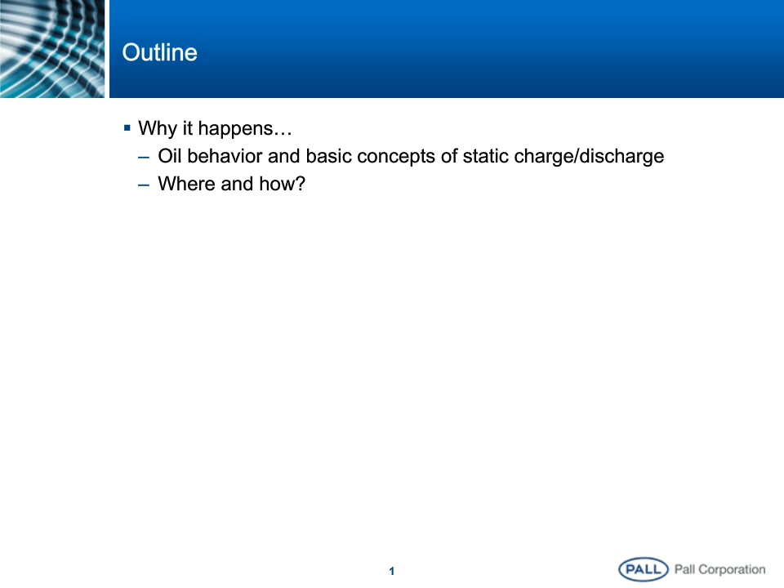So briefly, this is what we'll be discussing today. We'll start by discussing why this phenomenon happens. We'll talk about oil behavior and the basic concept of what makes a static charge happen, then dissipation and discharge. We'll see where it tends to happen and why and how it does happen. We'll also talk about why it's really a problem that may not go away. It's actually a growing concern, and it has to do with engineering consideration and some chemistry consideration that we'll touch on a little bit. We'll talk about the typical symptoms and consequences of a major ESD problem in a system.

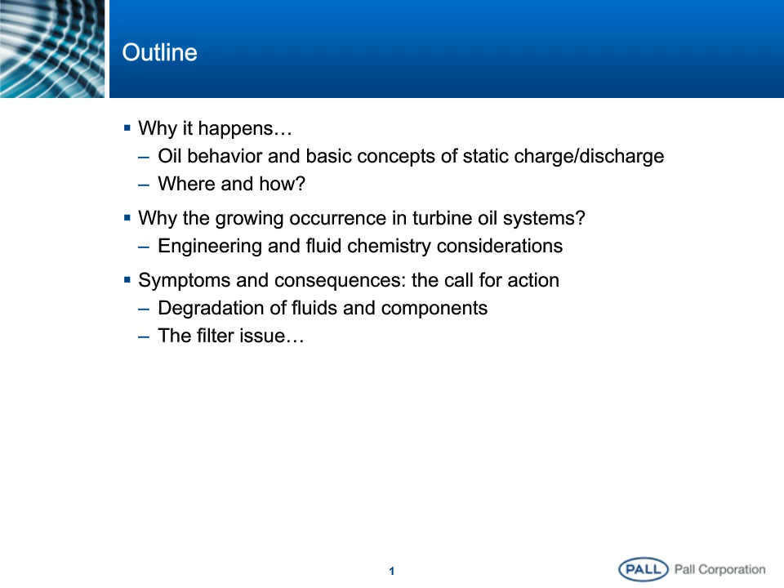We'll talk about degradation of fluids and components, what happens. We'll spend a little time discussing specifically the filter issue. And we'll give a few tips and direction when it comes to preventive measures. So again, we'll talk about how filter consideration can play a part and also be part of the solution.

And then we'll touch briefly towards the end on other subjects that we won't be able to cover fully today, but things like the influence of air, the influence of moisture, and things like micro-dieseling and so forth. We'll discuss a little bit of varnishing issues. And finally, we'll conclude and have a quick Q&A.

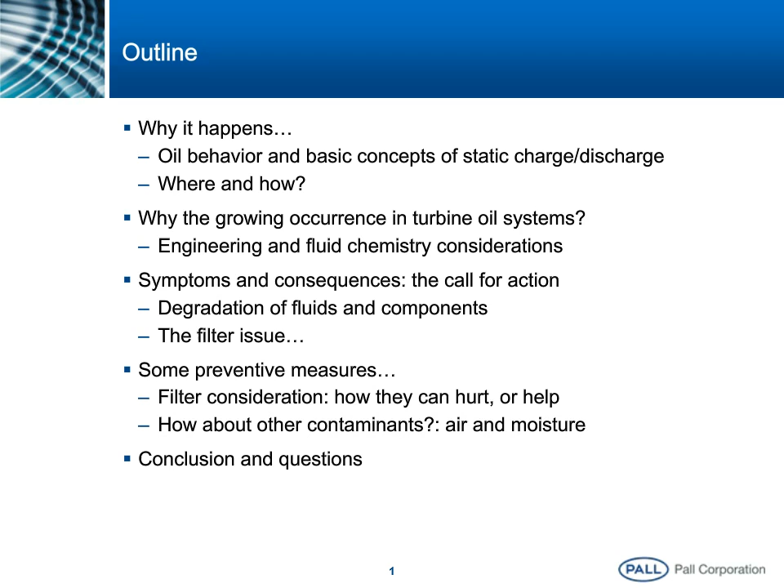So without further ado, oils can be conductive more or less, and that has to do with the fact that in their true sense, a true hydrocarbon, pure oil is actually an insulator, and the best example is the use of dielectric oils to insulate power transformers.

The oil can be polar, which is really why it tends to stick to metallic surfaces, and it plays a part in how it lubricates. So the polarity of the oil is something that is used.

More importantly, this insulating characteristic of the oil can go away very easily, and contamination will be responsible for this. So minute amounts of contaminants, down to a few ppb in a system, are responsible for a rise in conductivity of the oil. So in practice, really all types of oils can conduct electricity to varying degrees depending on their chemical makeup, more importantly depending on the contaminants that are present along with these hydrocarbon chains, if you will.

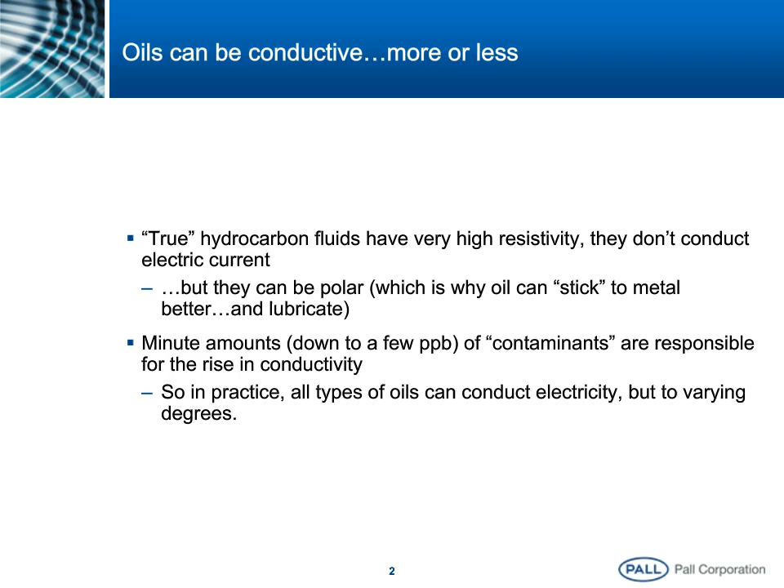Static charging has a lot to do with velocities or fluid dynamics. In its most basic form, static charging is really the exchange of electrons between two materials—so oil against metal in our case, or oil against plastic when we start talking about filters. But in general, two things rubbing together, depending on how their polarity is present or not, will tend to charge in opposite direction from the other. And that's really the basic of static charging.

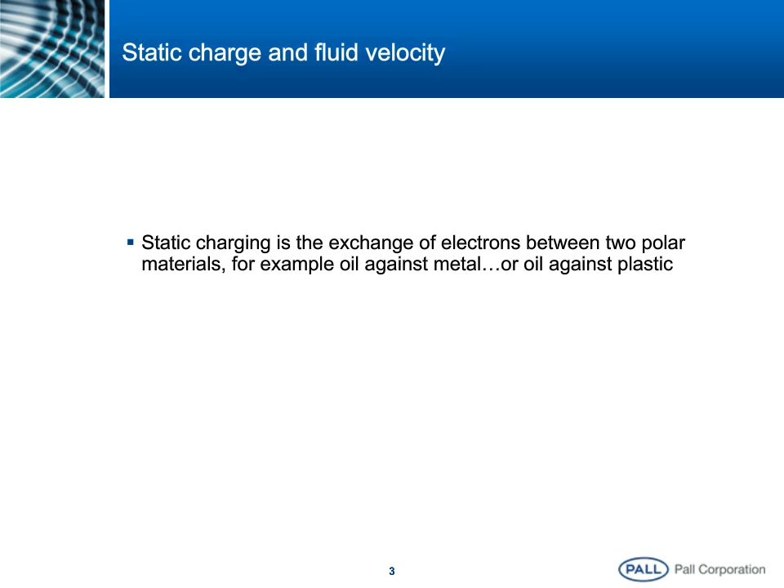So it is typically related to a few things, but a big contributor to charging is shear stresses, not just between an oil and a metal surface, but also between what I would call layers of oil together. To understand how that can happen, you can look at the little diagram at the bottom, where I show a simplistic schematic of a typical pipe, a typical velocity profile of a fluid going through it—in this case oil. What's important to remember here is the amount of charging is proportional, or at least dependent, on the velocity gradients. The difference in velocity between two adjacent oil layers is what's going to drive shear stresses and this rubbing effect that will create charging.

As a result, you can expect this charging phenomenon to be more prevalent close to the side of the pipe itself. You can see on the diagram, this area is where the speed basically goes from zero at the surface very quickly to the typical average velocity of the fluid. So there, velocity gradients are important, shear stresses are important, and you're going to create charges more importantly on that end.

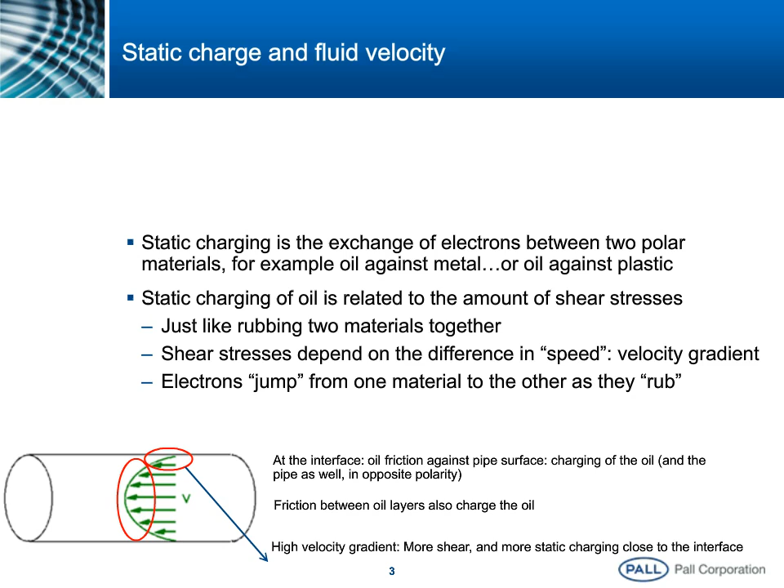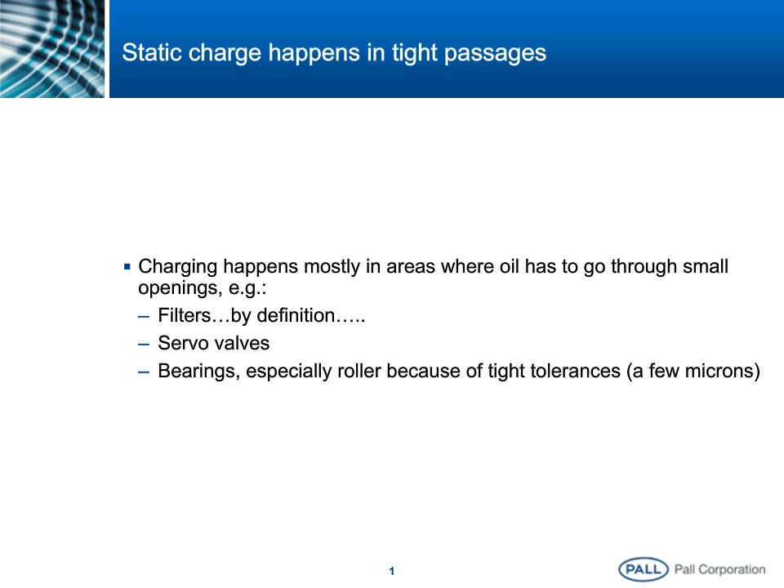Static charges will tend to happen in tight passages, related to velocity. In a situation where oil has to go through small openings, for example filters, servo valves, or bearings, especially when they have very tight clearances like in roller bearings, there is a chance that velocity and shear stresses will overwhelm the system and you'll start charging in that location.

Charging increases with viscosity because it plays a part in how the shear stresses are created, and of course differing electron affinity between the two materials. You have to have some polarity on the materials to charge them, whether between oil and metal, oil and plastics, or between oil components themselves, as we've seen earlier.

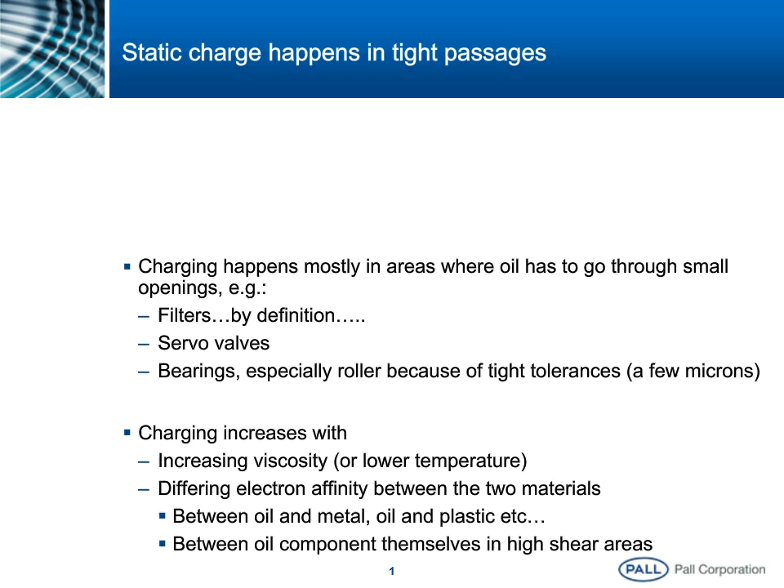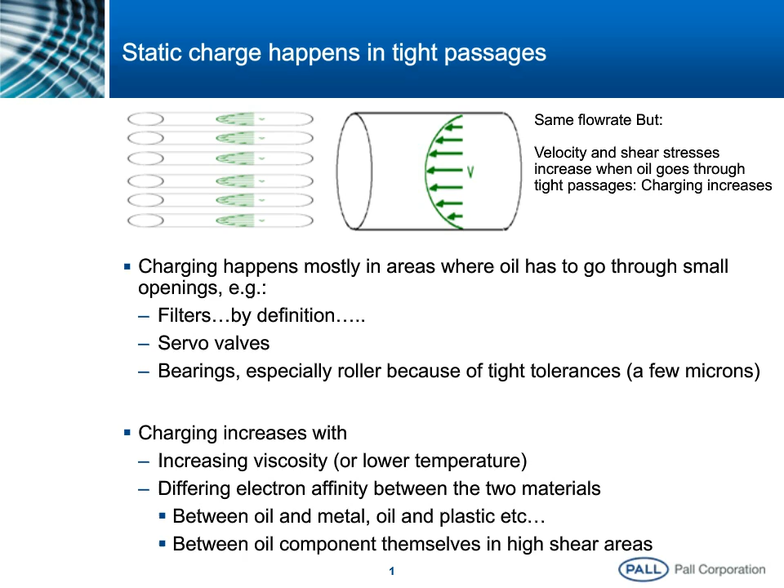So we discussed a little bit how things can charge up, how they can accumulate charging. But in practicality, charging is not necessarily the problem. Really, problems occur in the discharge phase, or dissipation. How the charge will dissipate over time is really what's going to drive whether you end up with a critical situation or not.

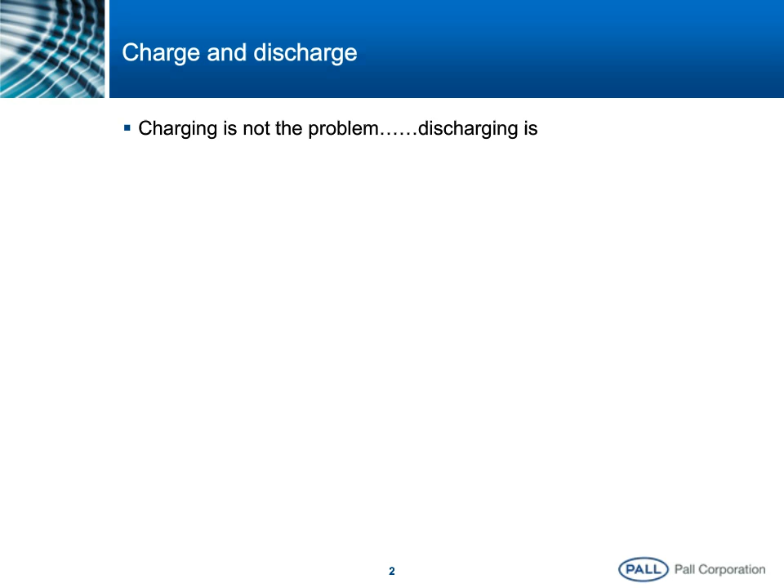The time it takes for a certain charge to go back down to zero is called relaxation time, and that time is mostly dependent on the conductivity of the materials at play. In a highly conductive material, or what we call high K, K being a measure of conductivity, charges can dissipate as soon as they are created if the conductivity is high enough, and there you have no problem.

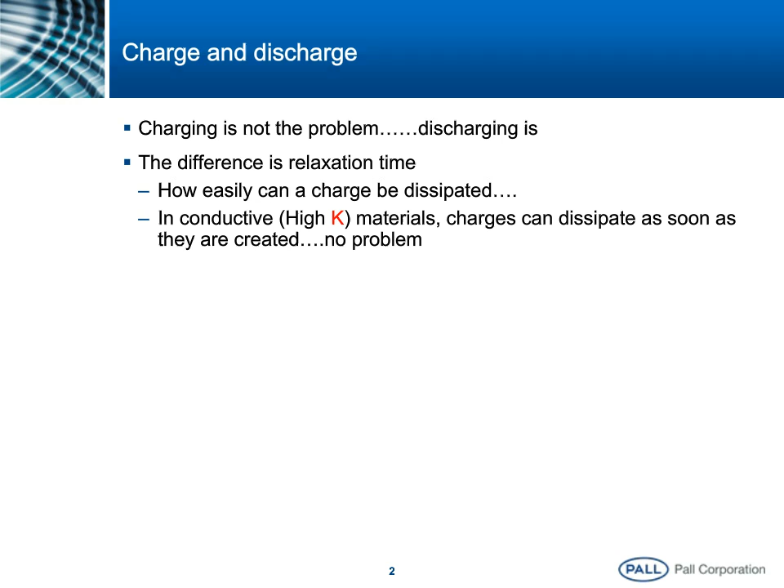In this example at the center of the slide, if you have a pipe wall with fluid going through it, passing through a filter material shown here in light beige, you'll tend to charge the fluid. By charging the fluid you'll charge the pipe around it, which is not a problem if the pipe itself is grounded—you'll eliminate this charge readily. The filter media, however, also picks up charge, and usually, especially in modern filtration, the filter material is not grounded and is actually quite resistant to current.

So when the filter charges, it will maintain its charge for a while. The oil will pick up opposite charges, and then carry this charge all the way downstream—that's what we call streaming current. If the fluid itself is non-conductive, this charge will remain in the flow. If, on the other hand, the fluid is very conductive, this charge tends to dissipate.

There is a dynamic relation between the initial charge and the charge at a certain time t, and without going into too much of the mathematics, it's an exponential decay with time. You start high, and then decay exponentially, and the exponential factor is dependent on the value of conductivity, K. If you track K in the formulas on the left side, you'll understand that when K is large, the charge tends to dissipate very quickly, and that's mathematically driven by this equation.

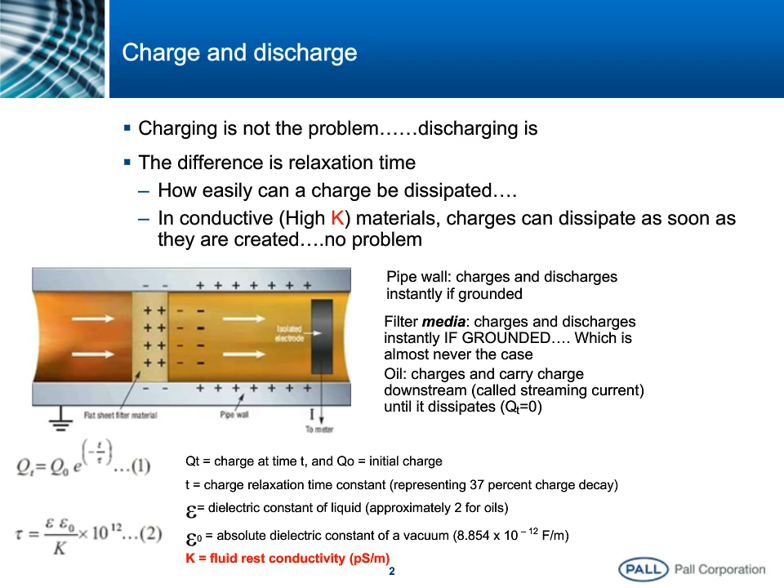As I mentioned earlier, there are some engineering and chemistry considerations that will affect how we charge up a system with static charge, but more importantly, how these charges can dissipate or not. So let's look at a couple of these engineering considerations that will affect shear stresses and, by extension, the charge buildup in the fluid.

We tend to run at higher velocities on more modern systems. The oil volumes tend to be smaller to save on cost and space, and therefore velocities tend to increase, resulting in increasing shear stresses in the system, especially when you go through tight passages.

More frequent starts and stops, when we talk about typical combustion turbines for example, means that thermal variations are going to cycle at a higher frequency as well. So you tend to get those viscosity changes on the oil when it gets colder versus hotter, and that will play a part in increasing the amount of shear stresses and therefore the charging in the fluid.

That, combined with the drive to protect components down to smaller sizes, means when filters get finer, the passages get tighter, and that also increases the rate at which an oil will charge. So this need for better protection actually plays a part in the prevalence of this phenomenon. Material decisions play a part too - whether you use metallic filters or plastic filters will affect how they interact with the charging phenomenon.

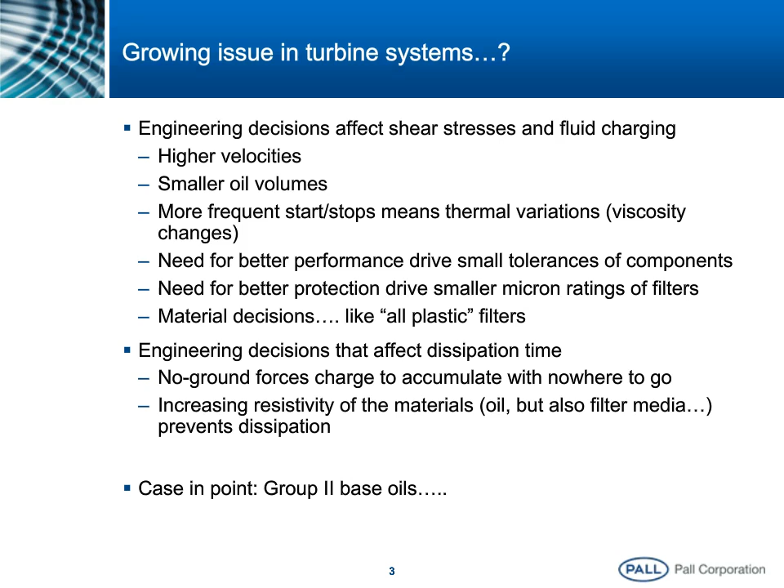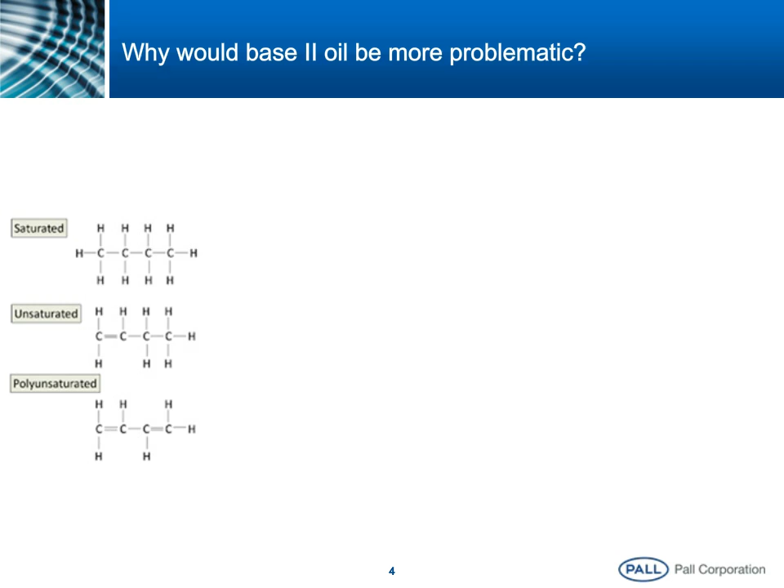Typical Group 2 base oil tends to use much more saturated hydrocarbon than their Group 1 counterpart. That has to do with how the oil is made - it is typically hydrotreated as opposed to solvent extracted the way Group 1 used to be.

That has a few major implications. One is, of course, the oil base stock becomes a lot more chemically stable. The fact that it is saturated means it doesn't have a lot of space and energy to interact with other chemicals or contaminants that could be present. So resistance to oxidation, resistance to aging is a clear benefit of having saturated hydrocarbon in the base stock.

It also helps the oil be more resistant to pressure loads, which helps its lubricating ability. And overall, the Group 2 base stock is a lot purer - much lower sulfur, lower metallics, lower paraffinic materials. So they are designed to last longer, more resistant to aging, more resistant to pressures, and they are purer. So that's all good.

That's all good unless we forget that purity comes at a price, and typically this price is higher resistivity, lower conductivity of this oil. So now you can imagine that where previously a Group 1 oil could charge but then dissipate quite easily because it was more conductive, it's not the case anymore with Group 2.

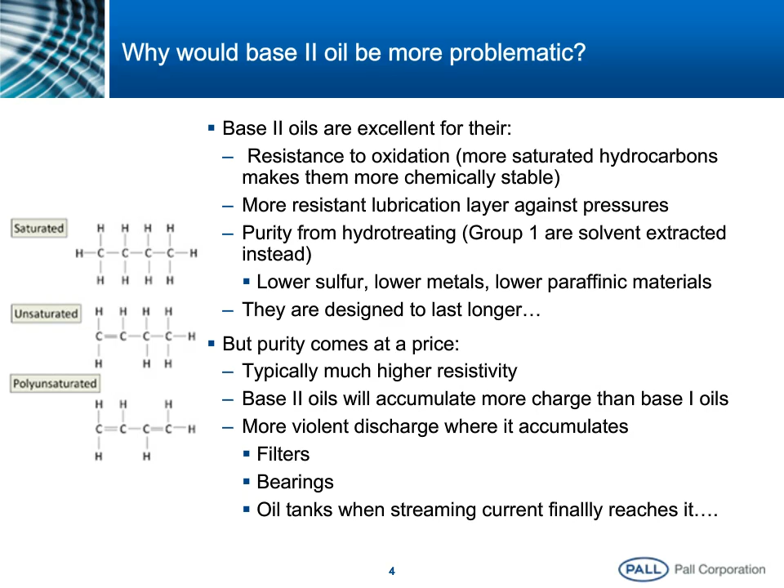So a few drawbacks are very important. Group 2 base oil will tend to accumulate more charges before it dissipates, and eventually you run the risk of having more violent discharge, especially around tight passages where charges accumulate a lot - filters, bearings, but oil tanks as well - because this oil is carrying this streaming current along with it, and it's not dissipating it until it gets to the reservoir. So that's where you run the chance of actually sparking inside an oil reservoir.

So the question is fundamentally, can the drawbacks outweigh the benefit? And if you are faced with acute electrostatic discharge, you soon realize that the system gets overwhelmed not only with the discharges themselves, but all the degradation products that will come with the degradation of the hydrocarbon chains.

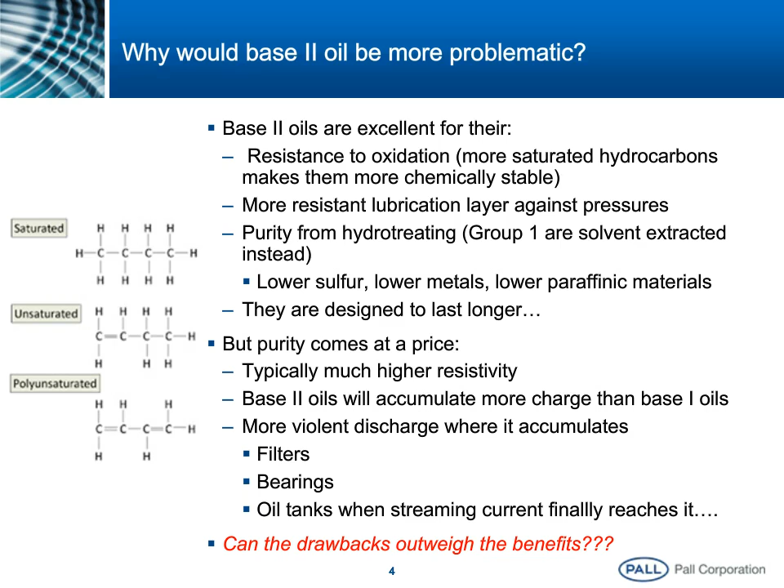So the main consequences and symptoms of an ESD problem in the system is that you will create very hot spots at very specific locations in the system, really where charges accumulate and eventually discharge violently through the oil, or through the filter material, or around bearings or fine valve passages. It will burn the oil, it will attack the materials and the components, and very importantly, that's what creates sludge and varnishes, which are typical byproducts of thermal degradation of the fluid.

And interestingly, you can hear that happening. The phenomenon is audible, which means that if you walk next to a large oil filter next to a turbine, if you have an ESD problem, you will hear it. You will hear this banging, metallic banging going on at the filter housing location.

The consequences on the fluids are tremendous. You lose your lubricating capabilities, you burn the oil. It basically negates all the oxidation resistance that you could hope for when using Group 2 base stocks. So the fluid gets overwhelmed, and where it's supposed to last longer, it actually degrades very rapidly if you have that phenomenon present.

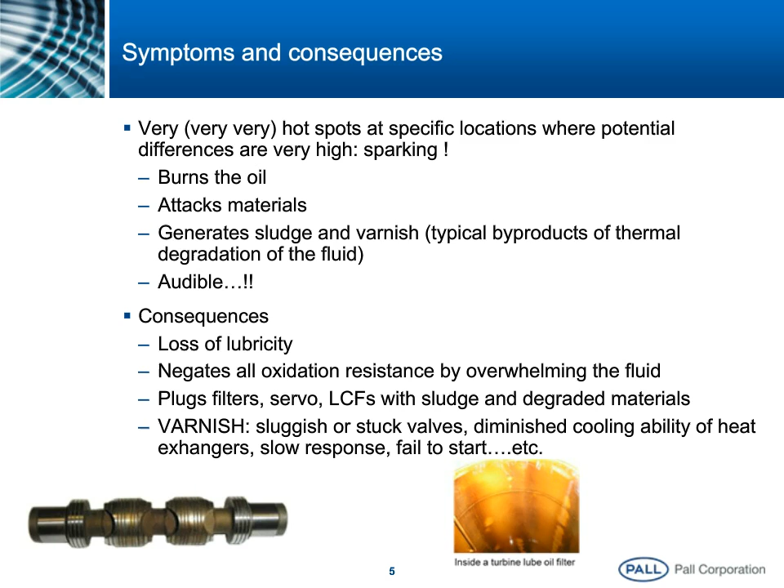So I want to spend just one slide specifically on the filter issue, really to talk about how filter technology evolved and the possible consequences on the phenomenon of electrostatic discharge.

Here's what we want when we make filters. We want a filter that lasts longer, so you get more surface area packed in the same volume. You want environmental advantage, and typically filter technology has evolved where filters have shed their metallic components. We would like to have something that we can crush and burn when the filter is spent, and metallic components have slowly been eliminated from many filter element designs of the latest generation.

So when you get better protection because you have smaller pores, smaller passages, when you use non-conductive, non-metallic materials, when you use chemically stable fine fibers, for example glass fibers, you end up with a system that can accumulate charges very easily and is terrible at dissipating them.

So filters will accumulate charges. They will violently discharge into the oil, and that will in turn degrade the efficiency, and you basically lose the protection that you were hoping for from the filter. So this ESD phenomenon is bad for the fluid, it's bad for the filter, and any protection you were hoping to get from using Group 2 base oil plus superb filters may be negated because you basically destroy both the oil and the filter.

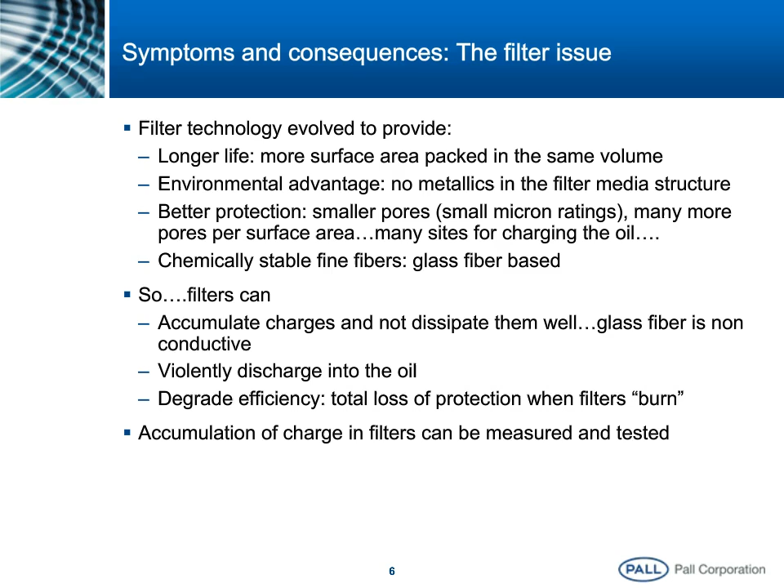Thankfully, we can study this phenomenon and we can hope to improve it. So accumulation of charge in a filter can be measured and can be tested. Very briefly on this next slide, you see what such a test filter apparatus would look like. It's quite easy actually to measure the charging of a filter material as oil goes through it.

All you need to do is have a charge collector, which is a piece of conducting material. You basically put it on the filter material itself, and it will pick up all the charge that would otherwise accumulate on the filter and send it to a multimeter so we can measure the rate at which the filter material is charging. So once we can measure it, we can hope to find solutions, materials, designs to alleviate this problem.

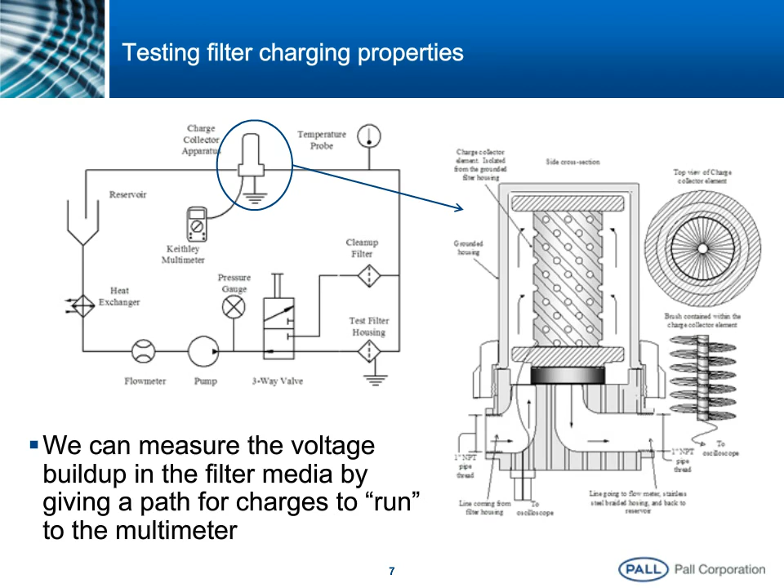So this is typically what the result of a test would look like. And on this chart, you see three different color curves. One blue, which is a filter that is not equipped with a way to dissipate charge, and you see clearly how fast charge can build up inside a filter element. You compare that with the other two curves, the green and the red.

These are surface-treated or specifically designed filters that will eliminate charges as they appear. And you can see it's fairly consistent throughout the flow rate range, so that means that even if you increase flow rates, you are able to dissipate charges just as fast as they would accumulate otherwise.

If you let a blue filter, let's say, charge up this way in the system, you'll end up with a situation where you'll discharge violently into the system. And the picture you see on the slide is an illustration of how violent this discharge can be. This is a picture from an oil reservoir subject to discharge. So these types of arcing and extreme temperatures can happen at the filter location as well.

But good news, as you can see on the slide, technology exists to really make sure that the filter does not accumulate charges as oil goes through it.

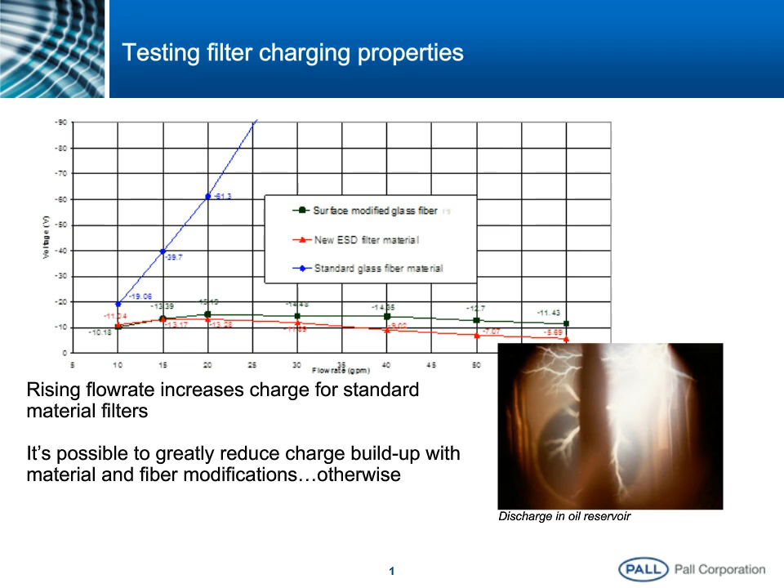What's their micron rating at this point? Only God knows. It could be anything, because really the structure, the media, the support layers have totally been burned away. And if anything, this filter has stopped protecting the machine.

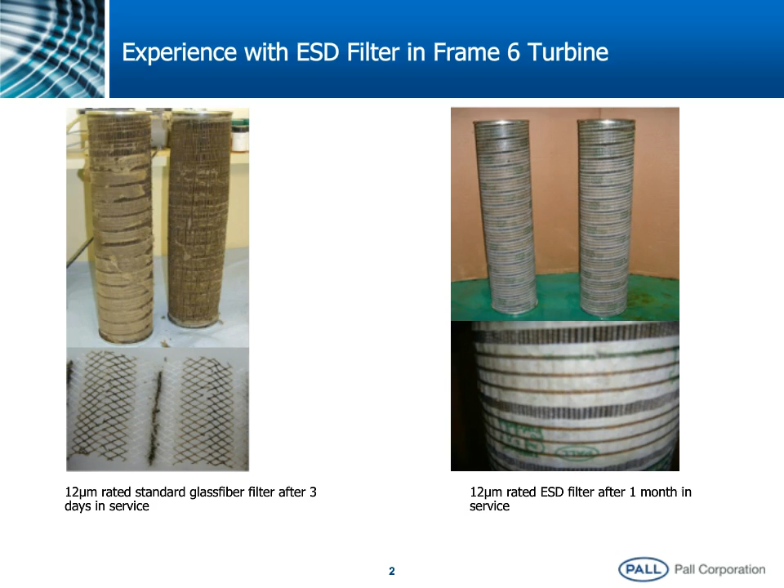Now, a dangerous reaction to this phenomenon is to say, okay, I will go coarser in order to eliminate the chance of static discharge. The problem is you start to sacrifice the first goal of a filter, which is to protect the machine efficiently.

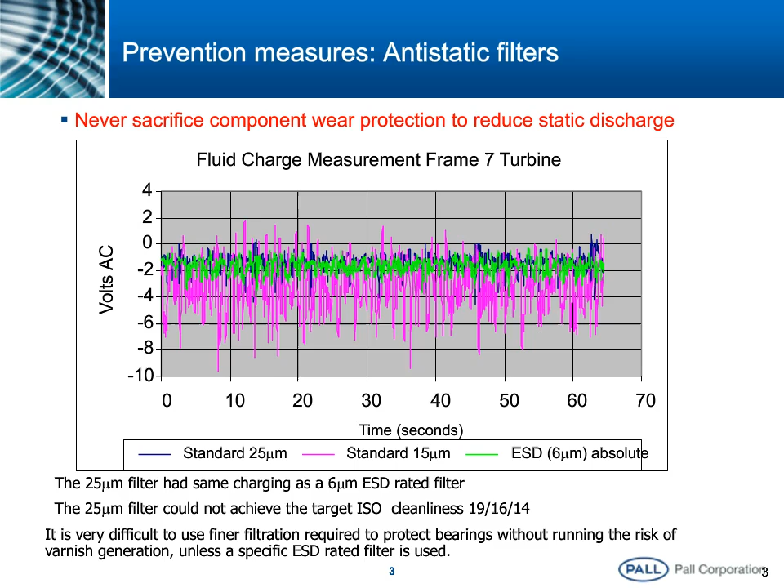So, as we wrap up this presentation, I want to give you a couple of other important considerations that we may not have time to cover today, but are important to keep in mind and will be the subject of further webinars in the future. Other sources of thermal degradation, besides static discharge, will also have similar consequences.

Fluid degradation, hot spots, degradation of components, etc. Microdieseling is a big part of that phenomenon, and it's related to the amount of air bubbles present in the system. The use of high temperature treatment that we sometimes apply to lube oil tanks is also to blame in the case of thermal degradation.

So you want to avoid things like high heat treatment, high heat, high vacuum dehydration. You really want to keep in mind that the oil needs to be kept at a decent temperature, for fear of launching oxidation processes that will rapidly degrade the fluid and its characteristics.

Similarly, you want to pay attention to varnish potential. Varnish itself will be the subject of a brand new webinar coming up, but in a nutshell, measuring static buildup in operation is impossible. You need to have a test. However, the consequences will become clear on the components themselves, and the presence of sludge and varnish is sometimes a good indicator that some kind of thermal stress is being applied to the oil. So you want to keep an eye on your varnish potential.

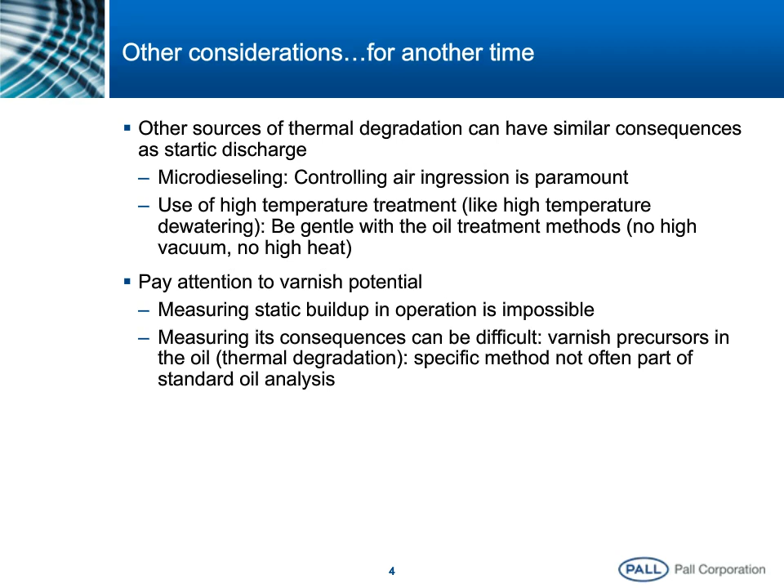Some measurements exist to monitor the varnish tendency for the oil, and that's an important part of an oil analysis. If the system gets heavily contaminated with the byproduct of static discharge, then preventive measures are still useful, but they won't be enough. You're beyond that point, and you need to look at potential solutions to remove varnish and sludges. Thankfully, these solutions exist, and I'm not going to discuss them today, but keep in mind that even if you're beyond the point where preventive measures are enough, there's still a way for you to get back to a more manageable situation on the machine.

And finally, obviously, standard oil analysis may tell you what's in the oil, but it probably won't tell you what should be and is not there anymore. So pay attention to additive depletion. That's a very important clue as to how fast the fluid is degrading.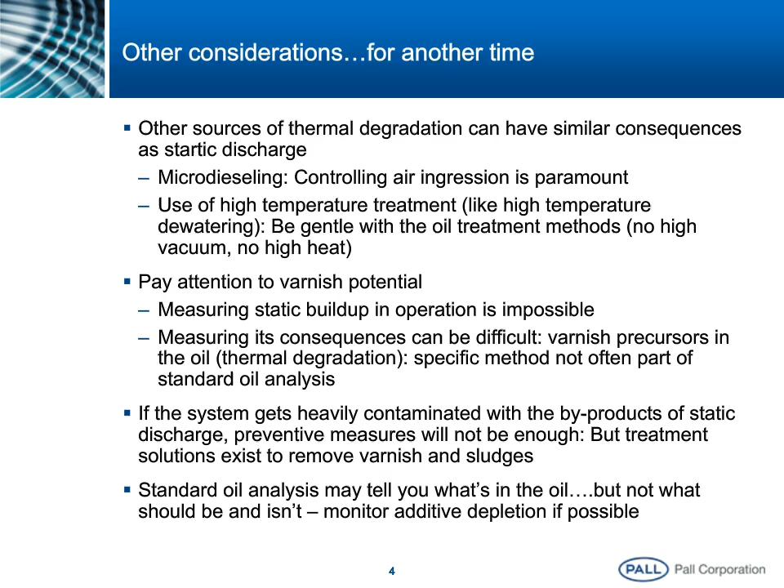And finally, in conclusion, what we've learned is that static buildup in oil is a very dangerous phenomenon and will degrade both the fluid and the actual machine components.

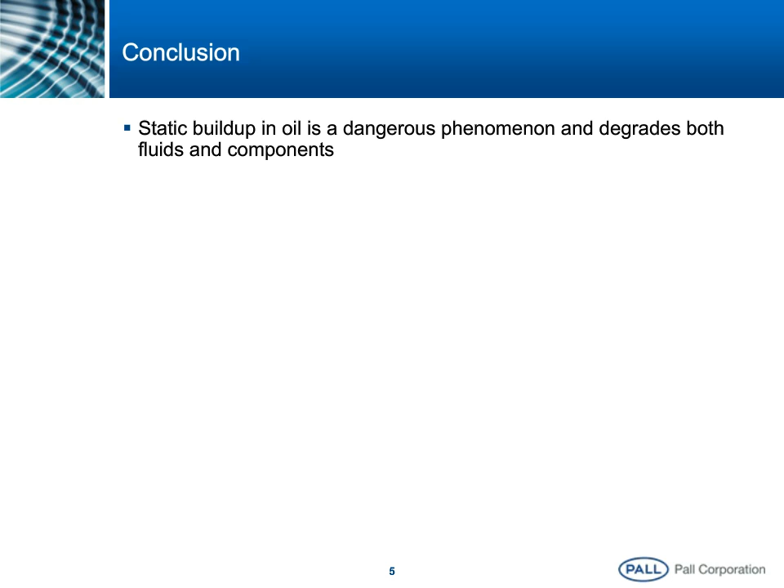New and efficient filter designs are important to protect the machines, but they're also potentially contributors to static discharge problems unless they are designed to be anti-static. These static problems will increase with new oil formulations, and we looked at the case of Group 2 base oils, and these are very prominent issues when it comes to potentially static discharge.

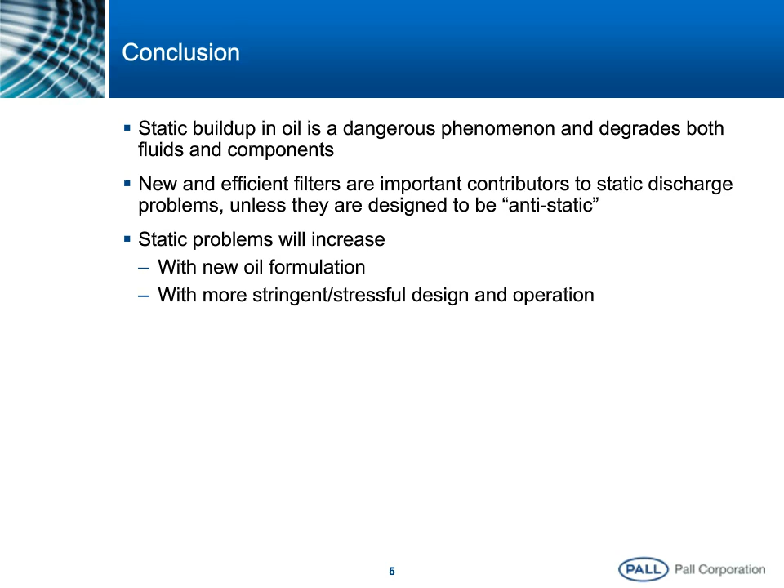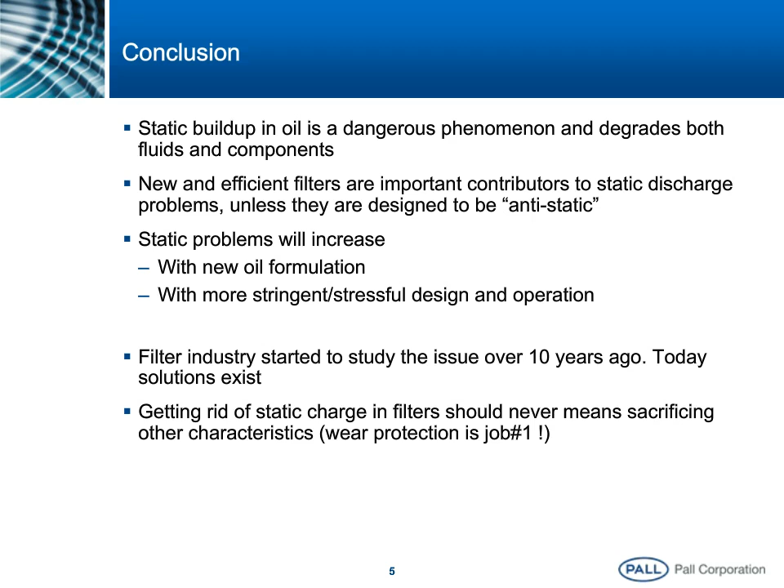The filter industry started to study the issue over 10 years ago. And so today, technical solutions exist so that you don't have to sacrifice filtration efficiency in order to avoid static buildup. That's an important point to remember, because getting rid of static discharge in filters should never mean that you need to sacrifice other characteristics of filtration, because wear protection is really job number one for a good filter.

So to protect the fluid, and really to get to the point where Group 2 base oils are really giving the benefits that we are expecting from them, other types of issues should be addressed as well, other than this electrostatic discharge. I mentioned briefly the issues of air entrainment and micro-dieseling associated with it, moisture, and wear metal control. All these issues play a part in how potentially the fluid will degrade thermally and through oxidation. So it's also important to keep an eye on those two things.